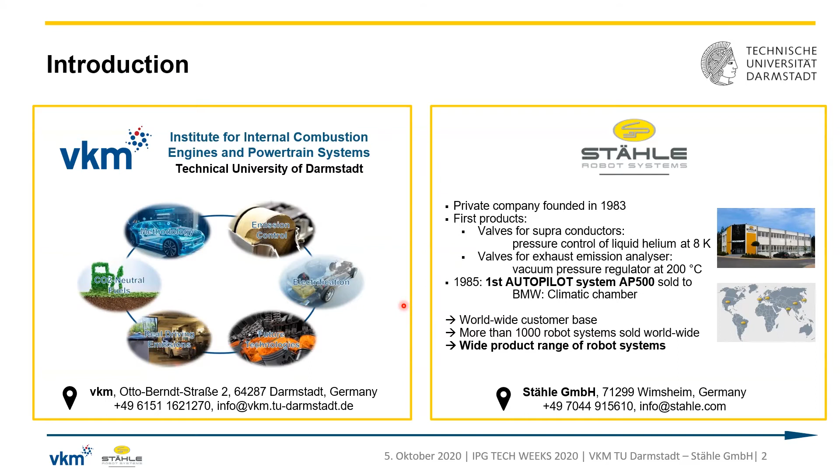Stähle, on the other hand side, as our project partner, is a private founded company, which is very well known for their autopilot systems, especially as an emission driver on the chassis dyno testbed. But Stähle also offers a very wide range of products and robot systems for various applications at a worldwide customer basis.

The content of my presentation today is the following. I will start with a short motivation regarding RDE, real driving emissions, and will then point out the development challenge which comes with RDE. I will present the co-simulated test environment, which we built with CarMaker testbed, with the Stähle driver module, and with the engine-in-loop testbed with an AVL Puma automation system. I will show you some results from this testbed, and I will finish with a short conclusion.

So RDE. RDE is a very common topic these days, since the European Commission adapted the homologation process in the legislation. And by then, it is not only necessary to conduct tests on the test bench with the vehicle, but also conduct tests on the public road and measure emissions with these tests.

And as you see here in this picture, this brings a very complex and statistical viewpoint to this topic RDE, because you have certain influences such as weather, route, traffic, of course, but the driver behavior is another influence, which are very variable and interact in between. So this makes RDE a statistical problem in this case, although it is fixed with certain boundary conditions.

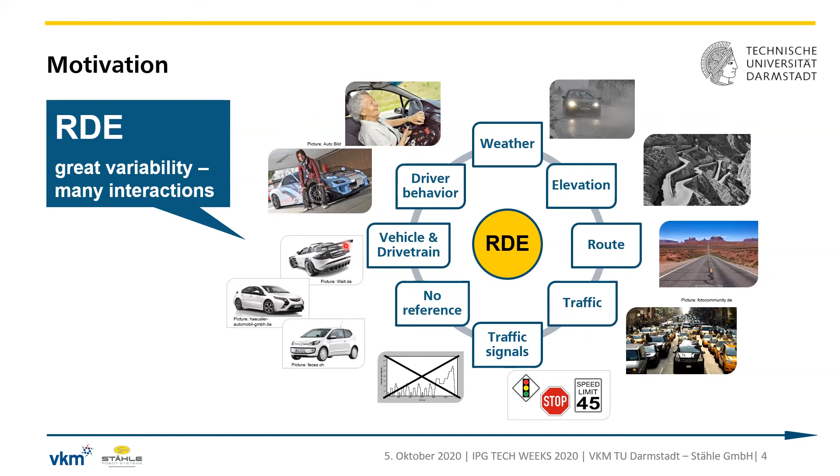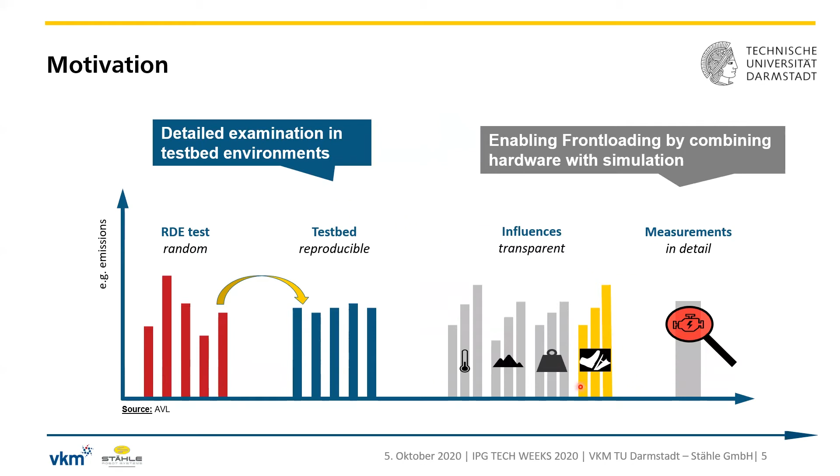And when you look at it from the view of development, it is really necessary to use front-loading approaches to make these RDE influences transparent and to be examined in detail. So what you do is you have your random RDE test, of course, and you try to move it to a test bed where it is repeatable and reproducible, and where you really can focus on your influences and impacts, for example, your driver impact here in a transparent and detailed way.

When you look at the development process here with the very well-known V diagram, which is applicable for real driving emissions as well, you start here on the simulating side with a backward simulation, go more into detail with the forward simulation. Here comes the CarMaker into play, in an office version, and then move further on in your development process with adding of hardware to your simulating tools for RDE development or powertrain development.

X-in-the-loop test benches are well known, starting with an engine-in-the-loop test bench where a real engine is replacing the engine model in the system and in the simulation, up to the vehicle-in-the-loop test bench where the car is replaced with the car on the chassis dyno test bench.

As I said, our project partner Stähle Robot Systems is offering a wide range of application for their driving robots for the test benches on the one hand side, but also in cooperation with certain software companies, AVL on the one hand side, but of course also IPG with the implementation of the Stähle driver module in CarMaker.

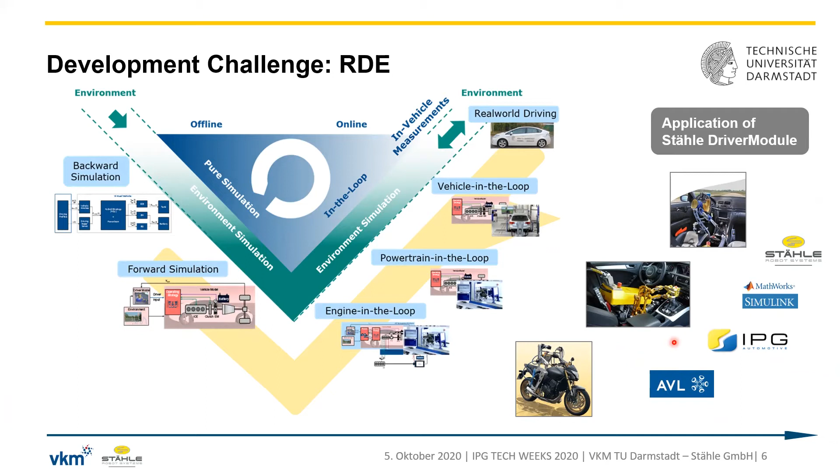The opportunity of the application of the Stähle driver module is, of course, that you have the same driver module or vehicle input generator for all processes, starting from simulating here, software in the loop, up to the test benches and to the proving ground. This means that you have the same behavior and same performance of your driver, of course. And Stähle puts great efforts into offering very human-like drive styles for their drivers, and focuses on repeatable and very precise driving.

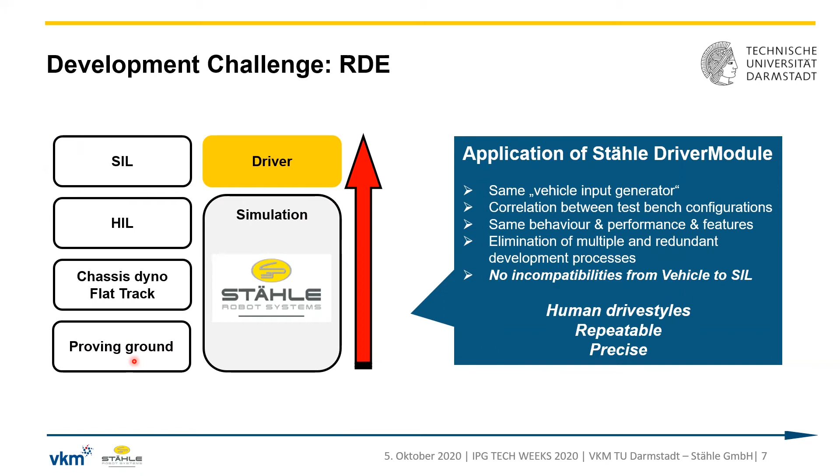And that's what we want to show you in the following on our results. But first of all, let me get a little more into detail for the RDE development, because as I said, RDE is a very complex topic with certain use cases which come into focus, not only repeatability and analysis of the certain influences, but also the use case of virtual integration of components for RDE testing, as well as the using of RDE reference cycles for calibration efforts.

And at the VKM, we developed a methodology toolbox for this, which is built around AVL Model and Testbed Connect, and which addresses RDE in early development stages with a co-simulating tool chain with certain methodology modules. For example, here in your use case virtual integration, you have the ability to add component models for your hybrid powertrain. You have the possibility to do co-simulating here with hybrid strategies, as well as with engine simulating.

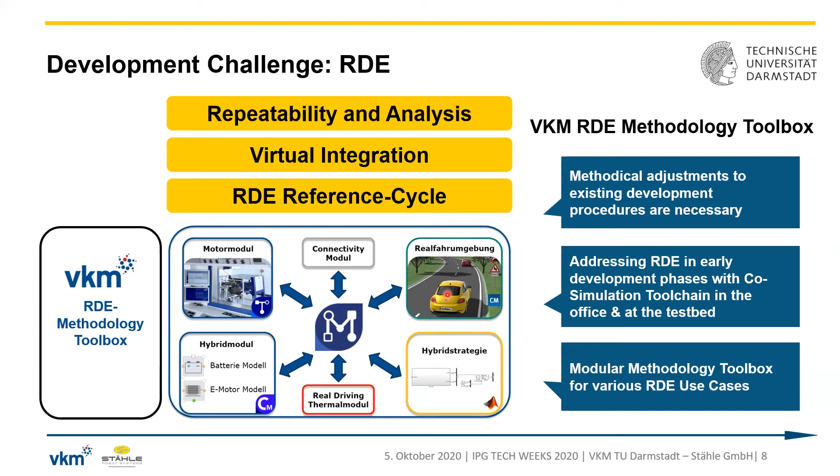And one very important aspect of RDE on the test bench is, of course, the real driving thermal impact on your test bench. And what we use in our presentation and our topic today is, of course, the integration of a real driving scenario with the use of CarMaker.

This brings me to the use case of my presentation today. We focus on RDE testing on the engine in the loop testbed with CarMaker and the add-on of Stähle driver module. And what we did is, of course, for the virtual driver, we need a vehicle speed profile on a digitalized road. So we created one synthetic road and cycle with the AVL cycle generator.

And we implemented this into the CarMaker environment on the office side, as well as on the testbed side with the add-on of the Stähle driver module, and then moved to the testbed where we applied it on the engine in the loop testbed here.

So the detailed focus of this use case is then the repeatability and the analysis, especially of our behavior of the virtual driver, here the Stähle driver module. And Stähle offers the opportunities to add very different drive style settings and strategies, as well as different shifting behavior and strategies. So we focus on that. And a big focus is, of course, test repeatability on the test bed.

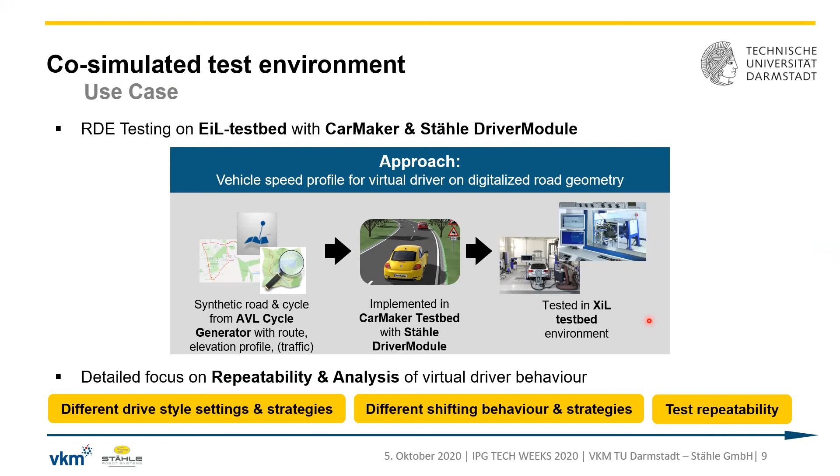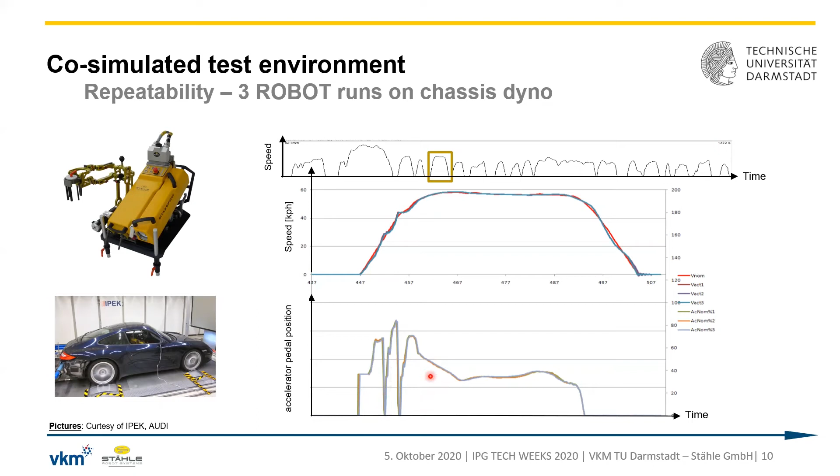And as I mentioned before, Stähle is paying high attention to human-like drive styles of their driving algorithms. So especially on the chassis dyno for emission testing of emission cycles, it's very important to focus on shifting behaviors and pedal behaviors, of course. When you compare the Stähle driver to a wide range of human drivers, you can do so with this diagram.

You have the delta throttle integral here, which is a measure for the activity of the driver, so for the pedal activity, so to say, and the delta speed integral here on this axis is a measure for the speed error or speed deviation to your set point profile.

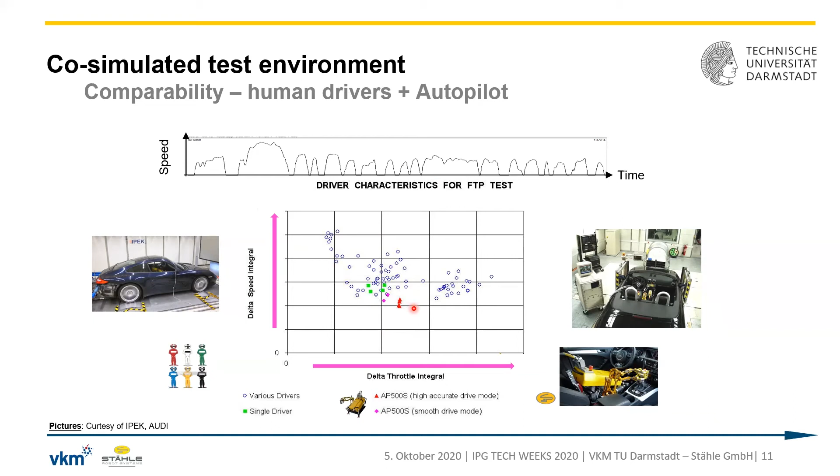And when you look at the Stähle driver here in a very high accurate mode, compared to a wide range of human drivers of this cycle, it comes into focus that the Stähle driver is of mid activity, but offers a very precise driving with a low speed error here compared to the human drivers. We use these measures for the results in the following, but I want to show you in the first step, of course, our test bed setup and our test scenario, which we used.

As I said, we are using an engine in the loop test bench with an AVL Puma automation system and with CarMaker testbed as a real driving simulation model here. And the idea of the engine in the loop test bed is the following, that you have a closed loop control connection here with the test bed and the simulation, where the pedal behavior of the driver and the set engine speed corresponding to your vehicle speed is put as input values to your test bed.

And on your test bed, of course, you do certain measurements. And of course, the measurement of the torque is then guided back to the simulation and is propelling the vehicle in our simulation.

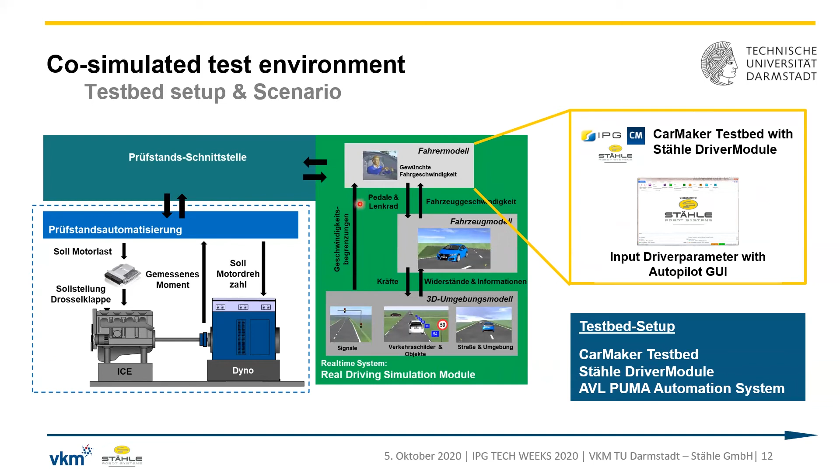What we then did is we used the Stähle driver module add-on, which is available for CarMaker and CarMaker testbed. And you have a graphical user interface here for the Stähle driver module, where you can input all the driver parameters and all the control parameters for your driver. The Stähle driver module is then acting as the main driver, which is driving and controlling the vehicle in the test run.

Let me show you the scenario which we used real quick for our tests on the test bed. As we are looking into real driving emissions, we decided to use the VKM commuter route profile, which is a driving profile which is very representative for commuter driving. So you have a trip share of about 60% in urban areas here around Darmstadt. And you have some parts of the test driving on the motorway here and some rural parts, and it is corresponding to the RDE legislation, but in a short route and short profile.

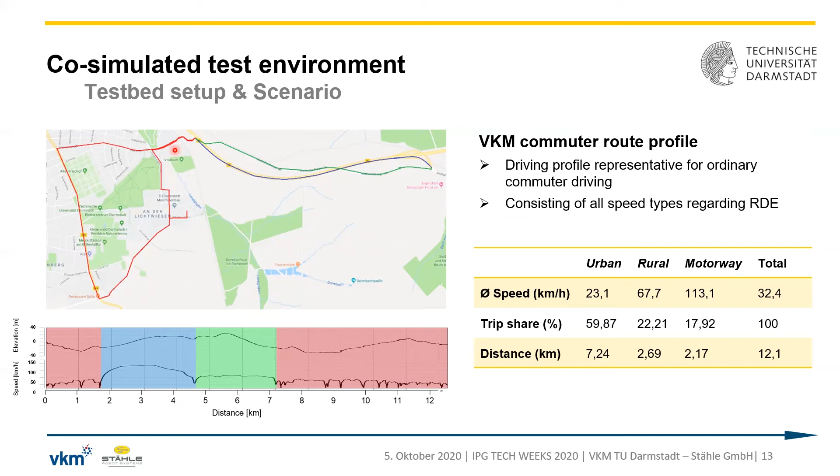Before we used this profile on the testbed, we digitalized this profile and used it then in CarMaker, but beforehand, we took a look at representative driving behaviors of RDE tests of the vehicle, which we simulated on the test bed later on. And you can see here a very common and very easy maneuver, an acceleration up to 50 kilometers per hour with different drivers, but all in the same maneuver. Of course, you have some deviations in the speed profile here as well, but what you can really see is that you have a characteristic accelerating behavior with the interruptions here by the shifting points.

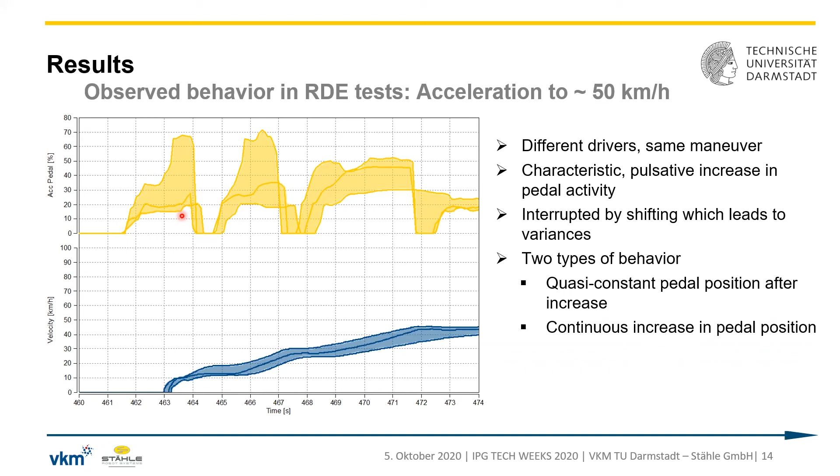But you also see that you have a certain variance between your drivers here, offering a wide scatter band where your different driver styles are located in. And we take this into account for our test bench measurements, which I want to show you here. So we move then to the test bed and tested our commuter route profile. You can see here the velocity profile, urban part, and here driving up to 100 kilometers per hour.

And we tested two different driving style setups for the Stähle driver, driver 1 and driver 2. One driver is a very highly accurate driver, and one driver is a little softer driver with softer controls. And what you can see at first hand, when you look at the velocity set profile here, is that both drivers, although different in the parameterization, follow the given set profile in a very precise and accurate way. You have some deviations, of course, here in the pedal positions. So the drivers act a little different in their pedal actuations, but that's clear because of the different parameterizations.

And to really look at these differences, you can see in this diagram here, as I explained a few slides before, we took a look at two important parameters to describe driving behavior. On the one hand, RMSSE, which is the root mean squared speed error, which is a measure for your speed deviation from your set point profile. And we took a look at ASCR, which is the absolute speed change rating, which is in this case a measure for the driver pedal activity. So to say, how nervous the driver is acting on the pedals.

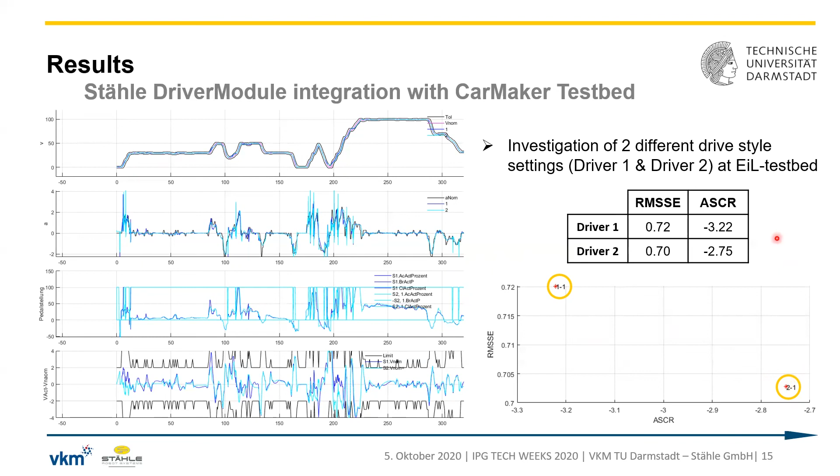So let me conclude this and give you a short conclusion on the results. First of all, RDE, as I have shown, is a great challenge these days, with great variability in the influences and with many interactions. And for RDE, it is necessary to use front-loading methods with reproducible and in some cases automatable test benches, to focus the development on the test bench side. And at VKM, we developed a methodology toolbox for this to address various RDE use cases with modular approaches.

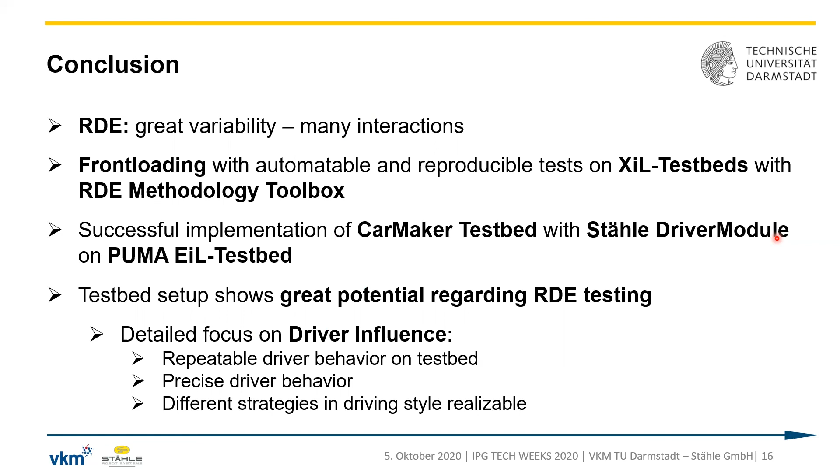In this presentation, I showed you that we implemented CarMaker with the add-on of the Stähle driver module on the engine-in-the-loop testbed. And this testbed setup shows a great potential regarding RDE testing. I showed you some first results from the testbed. And one important aspect, of course, is that the tests on the testbed are repeatable, that the driver behavior is repeatable. And as I could show you, the driver behavior with the Stähle driver add-on is very precise for this use case, and we have the opportunity here to implement various driving styles and driving parameters to really focus on the driving behavior regarding RDE development.